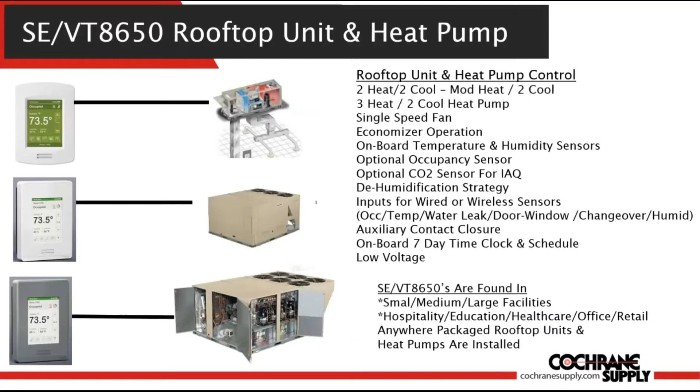The 8650 series room controllers are typically found on units that are installed in all types of facilities, from small to large, hospitality to education to healthcare to office and retail. Basically anywhere packaged rooftop units and heat pumps are installed. 8650 series room controllers are configurable devices. They have an embedded sequence of operations that are tailored for rooftop and heat pump applications.

Configuring the device is done through the touchscreen interface, so there's no software required, there's no licensing fees, and there's no downloading required. It's ready to use out of the box. Accessing the configuration pages is done by pressing the top portion of the screen. This will take the user to 2 pages of setup that include configuring the operation of the device, network settings if connected to a network, configuring the set points, configuring the display, setting the time clock and schedule, associating wireless sensors, as well as commissioning operations.

The 8650 series controllers can save you money when compared to traditional DDC installations. As I mentioned, there's no software licensing required. One device is mounted on the wall as compared to installing a controller in the control enclosure and mounting a separate temperature sensing device on the wall, or multiple if you need humidity, CO2, or occupancy sensing.

The configuration is done through the touchscreen interface, so engineering doesn't have to create a program that has to be downloaded to the controller. No computer is required. Configuration is simple and straightforward, so technicians or electricians of all skill levels can configure and install the room controller. In the end, saving time and skill adds up to a lower total installed cost.

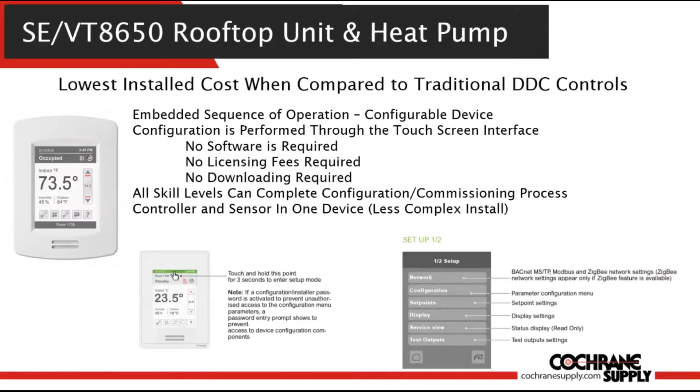Here's a look at all the options that are available on the 8650 series room controller out of the box. Notice this controller has 7 inputs and 9 outputs that are used based upon the way in which the installer configures the room controller. Inputs can be configured for operations like fan proving, window and door switches, dirty filter, or general service notifications. An input can be used for a remote CO2 sensor. However, there are options for an onboard CO2 sensor or wireless CO2 sensor.

An onboard sensor would provide you with temperature, humidity, occupancy, and CO2 sensing all in one box on the wall. A remote space temperature sensor, supply air sensor, outdoor air temperature sensor, and airflow measuring station inputs are available. As I mentioned, you can configure the 8650 to be a rooftop unit controller or heat pump controller. When used as a heat pump, the reversing valve can be configured for O or B.

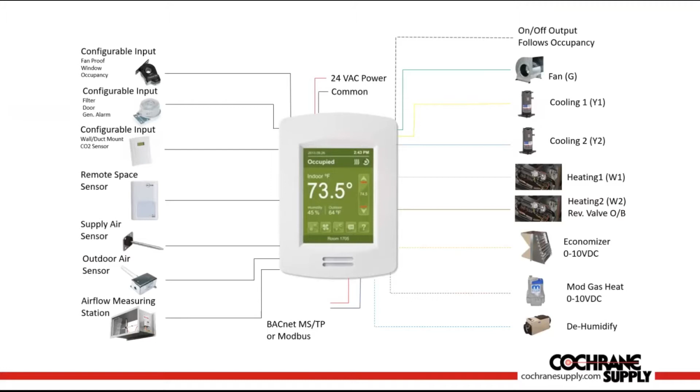So you can have a 1 heat, 1 cool, 2 heat, 2 cool, or modulating heat, 2 cool rooftop unit, or a 3 heat, 2 cool heat pump. There's an analog output for economizer operation, analog output for modulating gas control, and a contact closure for dehumidification operation. Just to reiterate, one part number has all of this configuration flexibility. There's not one part number for RTU, a different part number for heat pump. One part number can be configured for any of the above mix of inputs and outputs.

The test outputs and service view screens are great ways to verify the installation is performed correctly. Service view provides values of the attached sensors, the outputs from the heating and cooling proportional integral loops, and if there are any alarms, like an open window, dirty filter, or general service alarm. Basically, it's a way to view what's going on inside the controller without the use of a computer or commissioning software.

Test outputs will verify wiring and operation for heating stages, cooling stages, fan, reversing valve, economizer, etc. Kind of like a hand-off-auto switch. Electricians and technicians can use this to verify correct wiring to the outputs has been performed. There's no need to fake out the controller by changing set points to force heating or cooling operations to begin. After a 2-minute timeout or navigating to other 8650 screens, it will set the unit back to the proper output, so you don't have to worry about leaving any setting in override. Knowing the unit is functioning correctly provides confidence that you won't have to revisit the site or the unit to make wiring connections.

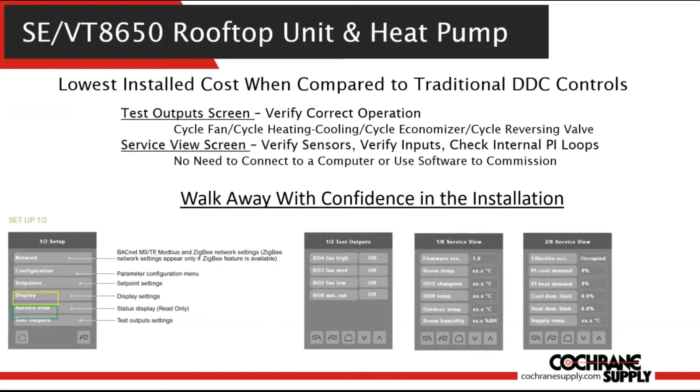The VT8650 room controllers are a great choice for all the smart building construction and retrofitting going on these days. In addition to the onboard time clock and schedule, every room controller has BACnet MSTP communication. The devices are BACnet Testing Labs tested and listed. There are around 500 points or so in each controller that can be read or written to by virtually every BACnet supervisory system on the market.

These 8650 series room controllers also have the capability to communicate via Modbus RTU. So if you run across an existing installation that's got a Modbus network, there's no need to run a new trunk for BACnet. Just toggle the communications on the controller to Modbus and add it to the network.

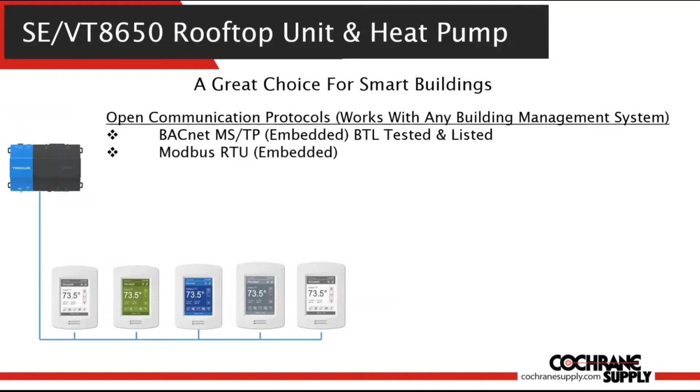ZigBee Pro wireless is also a communication option. ZigBee is a wireless protocol that is a wireless self-healing mesh network. It would eliminate daisy chain hardwiring like a BACnet MSTP or Modbus network. It involves the use of a coordinator that creates a wireless personal area network, or PAN, that the controllers join and use to communicate. The coordinator can be a standalone device, as it does have scheduling, trending, and alarming capabilities, or it can be connected via Ethernet cable to a supervisory device that communicates BACnet IP.

You can connect 20 to 25 of the 8650 controllers to each coordinator. The communication bubbles can be anywhere from 50 feet in diameter to 250 feet in diameter, depending upon the construction of the facility. ZigBee installations are well suited to locations where the cost of wiring is expensive or where the facility may undergo renovation changes periodically. When they change the configuration of the facility, there's no need to reroute the communication bus.

Additionally, they're great for retrofit situations where the owners would like to have a network, but the construction is not suited to fishing communication wire. Think of installations that are architecturally important, like museums or historical sites, locations that may have asbestos in the walls, or locations that cannot endure extensive downtime, like hotels that can't rent their rooms if work is being done.

The 8650 controllers can come with ZigBee communications embedded in the device or added later via communication card installation. So construction can be performed in steps if there are budgetary constraints. First, add the room controllers, then at a later date, add the wireless communication cards and coordinators.

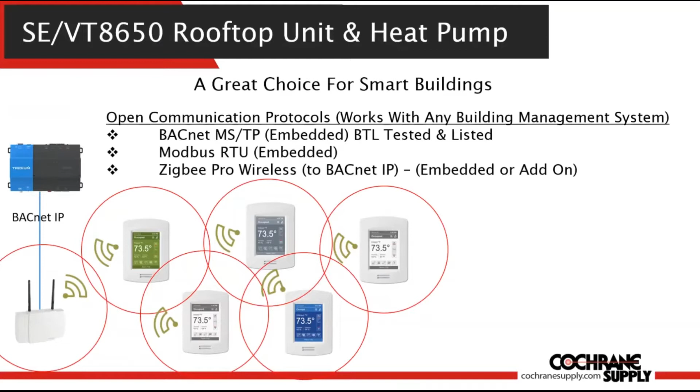The 8650 controllers also support the addition of a Wi-Fi communication card. This allows the room controller to connect to a Wi-Fi network router and can be used in standalone applications or connected to a building management system. In a standalone application, the 8650 can be configured to notify or alert the appropriate parties via email of malfunctions, like temperature, humidity, or CO2 values that are out of range, or if there's been a fan-proof fault or a dirty filter alarm. A building management system or supervisory device is not required. Essentially, this lets you know of a problem so you can react or perform the necessary maintenance.

In larger installations, Wi-Fi can be used to speak BACnet IP to a building management supervisory device. The benefit of this style of installation is that quite often there's an existing Wi-Fi router in place that can be used. Also, the communication between the room controllers and the supervisory device is much faster than BACnet MSTP. So all of today's analysis and analytics programs can act and react in a more rapid manner. Similar to ZigBee, using Wi-Fi communications allows for network installation in a building that is not suited to traditional daisy chain hardwired network installation.

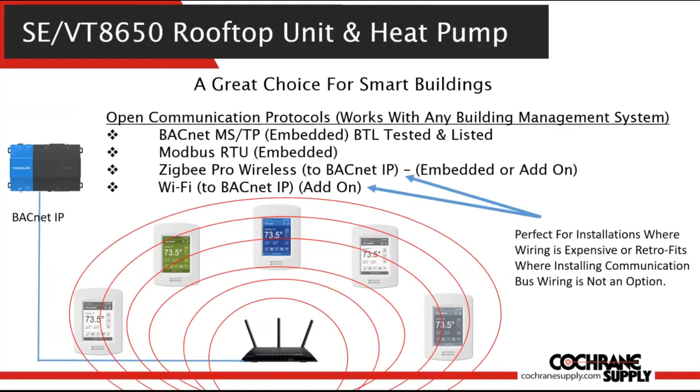The 8650 series room controllers employ a proportional integral, or PI, control loop. This means that over time, the loop will tune to the space requirements, keeping the space temperature closer to set point, reducing the overshoot. This translates into more comfortable occupants, higher efficiency, less energy use, and less wear and tear on the mechanical equipment.

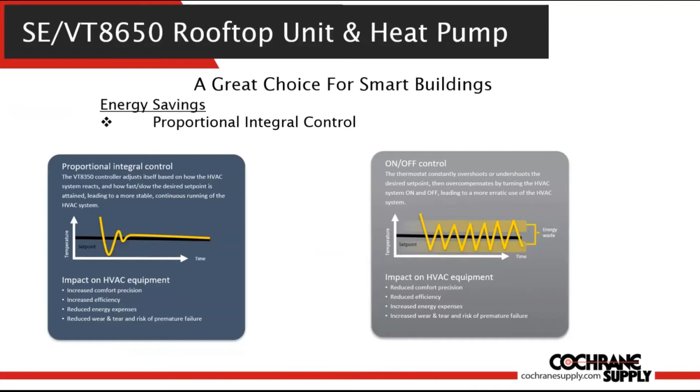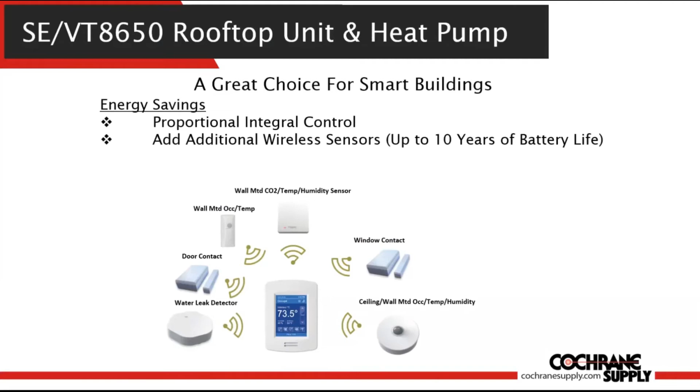Employing the use of additional sensors can also help to save energy. As we saw in previous slides, sensors can be hardwired, but the 8650 room controllers can support 10 wireless sensors. Temperature and humidity sensors for remote sensing, averaging, or high-low signal select. Remote door or window contacts: if the window is open, disable the heating and cooling functions until the window is closed. Water leak detectors, and occupancy sensors. The sensors can have up to 10 years of battery life and use standard off-the-shelf batteries.

Using these hardwired, embedded, or remote wireless occupancy sensors, or using multiple sensors to measure from different locations, has shown to reduce energy costs from 10 to 30%. These sensors are all passive infrared, or PIR, sensors. They can detect motion as well as heat.

The 8650 room controllers have 3 set points: unoccupied, standby, and occupied. When the controllers sense motion, they control to the occupied set point. If no motion is detected for a user-defined period of time, the room controllers will change from occupied set point to standby set point and begin another timer. If no motion is detected for that user-defined period of time, the room controllers will change from standby set points to unoccupied set points.

If at any time motion is detected, the controller will revert to controlling to occupied set points once again. There's no need to condition a space to occupied set points when there is no occupancy. Standby allows for that drift from occupied set points so that the equipment will not have to make up as large of a temperature delta once the occupants are in the space. Again, the standby and unoccupied timer periods are user-defined and adjustable from 1/2 hour to 24 hours.

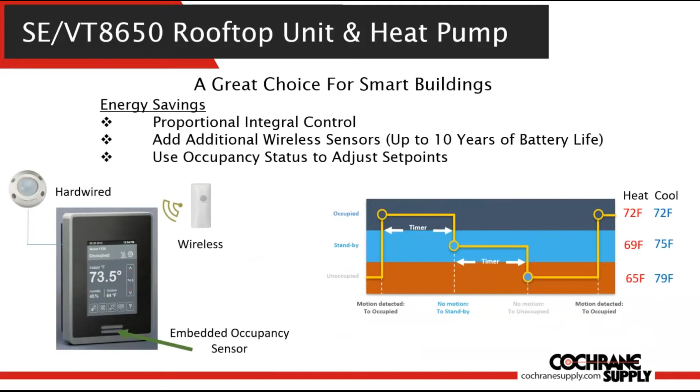With all of the functionality and flexibility built into the 8650 series room controllers, we tend to forget that this controller is what the user sees in the space. These room controllers look great on the wall. There's 2 brands, the Schneider Electric version and the Viconics version. The Schneider Electric version, which begins with the letters SE8650, comes with a white case and white fascia, or silver case and silver fascia. Alternate fascias are available to fit a multitude of installations where aesthetics have to be perfect. There's versions of wood grain, glossy, and even aluminum.

The Viconics version, which begins with the letters VT8650, only comes in a unified white face, fascia, and case combination. With either model, multiple background colors can be selected. Again, background colors can be selected from the touchscreen configuration pages, and there's even a BACnet point that can be commanded from a supervisory system.

The displays are configurable as well. The full display shows space temperature and set point adjust. There's a heat symbol for heating mode, snowflake for cooling mode. Fan operation is displayed by the fan symbol. When all 3 segments are lit, the fan is on.

You can choose to display the date and time, which buttons appear on the bottom of the screen for operation, for instance, the mode button for heat and cool, fan button for fan speed, degrees C/degrees F button, language button, and help button. Many times buttons are removed to limit the control occupants have over the operation of the equipment. You can also just choose to display the outdoor air temperature, humidity, or CO2 level.

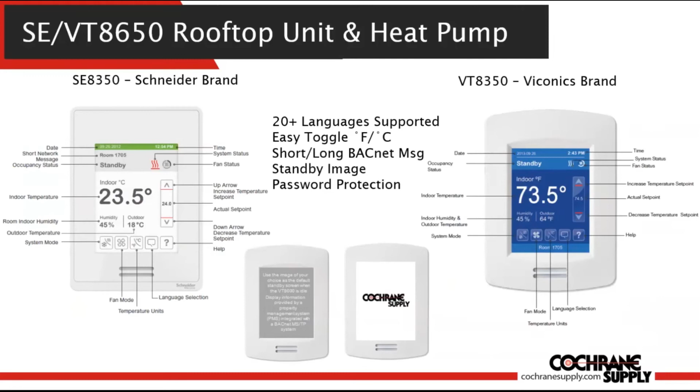These room controllers also support just about 20 different languages. In today's global economy, there's people from all over the planet vacationing and working throughout the U.S. Access to the configuration screens or to any of the buttons on the touchscreen can be password protected, so access can be denied to those who have an inquisitive nature. Hopefully, we've got a hardware design and interface that looks as great on the wall as the horsepower under the covers for today's smart buildings.

The final aspect of these room controllers that I'd like to touch on is for those of you who have installations that require more functionality than what is built into the standard configuration and sequence of operations. Typically, the built-in operations of the 8650 controller will meet any rooftop unit or heat pump control type of installation. But there's always an installation or an engineer who wants to do more. These controllers are capable of more because if you need to, they can be programmed to build upon the standard sequence or change the styles of inputs and outputs.

As I mentioned earlier, these controllers have 7 inputs and 9 outputs that get used up as you configure the device. The 7 inputs are universal, meaning they can be temperature inputs, binary inputs, or active 0 to 10 volt DC inputs. Of the 9 outputs, 5 of them are binary, but 4 of them are universal. They can be on-off or a modulating 0 to 10 volt output. With a program, you can change a binary input to a temperature input or to a 0 to 10 volt input. You can change a binary output to a modulating one.

You can add stages of cooling or heating, add an outdoor air humidity sensor for enthalpy-based economizer, power exhaust. How about modulating heating and cooling? You can average multiple sensors to control a larger space. You could incorporate an input from a card reader in hospitality installations. You can even customize the touchscreen buttons for special functionality. We've got a library of over 2,000 programs that are modifications we've worked on over the last couple of years. So please ask your Cochrane representative if you're looking for functionality above and beyond what comes out of the box.

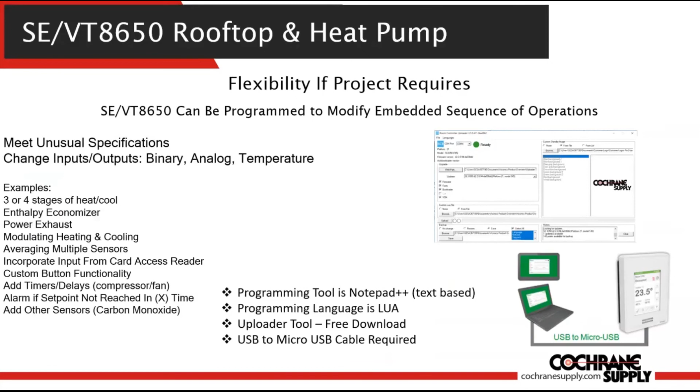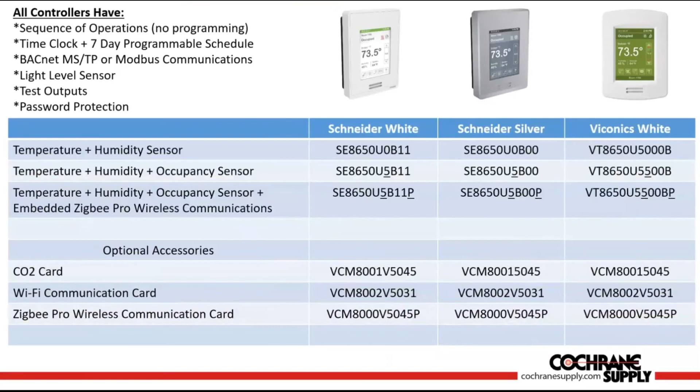Here's just a quick look at some of the models that are available. Base models come with a temperature and humidity sensor; a temperature, humidity, and built-in occupancy sensor; a temperature, humidity, occupancy, and built-in ZigBee communications. Notice there are the white and silver options in the Schneider offering. There's also add-on accessories for onboard CO2 sensing, ZigBee communications, as well as Wi-Fi communications. All installation, configuration, commissioning documentation, and supporting collateral is available on our Schneider Electric or Viconics website.